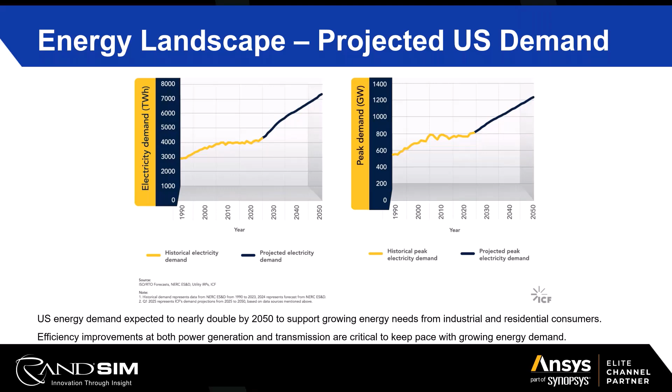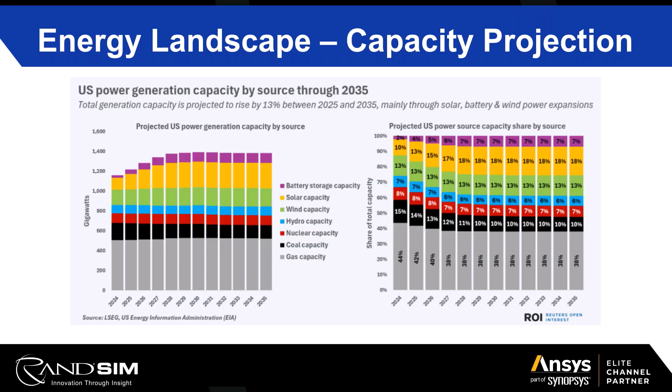For the topics of our discussion today, we're going to focus a little bit closer on wind generation. Now, while it certainly doesn't have as large of a projected growth as battery storage and solar, that doesn't mean that it's going to go away. And it certainly has benefits to be considered. And there are many simulation approaches that are worthwhile to discuss inside this domain.

So here's just a quick overview on wind energy and how we're able to capture the power from the wind. The first question that we might ask ourselves is why wind energy? Why is that a potential solution for our energy demands, or at least a contributor? One benefit is that it's renewable, meaning that it does not have a recurring fuel cost. Once it's been installed, it's intended to stay there for anywhere from 20 to 30 years.

They're highly scalable, which is quite beneficial because there are maps of the United States that show what the average wind speeds are, and it's not uniform across the United States. There are certain areas where wind is blowing at a faster speed than others. So you go where the wind is when you're thinking about deploying wind farms. And in doing so, the scalability is very important.

It's not very common that you'll see a single wind turbine when you're driving along the highway. There's oftentimes multiple of them, to take advantage of a location where wind is consistent and at a velocity that we can generate power, and where there's available room to scale out and maximize that. It has the largest renewable capacity behind solar, and when we start thinking about offshore deployments, meaning wind turbines installed out in the ocean, the deployment and land considerations really open up the doors for scalability.

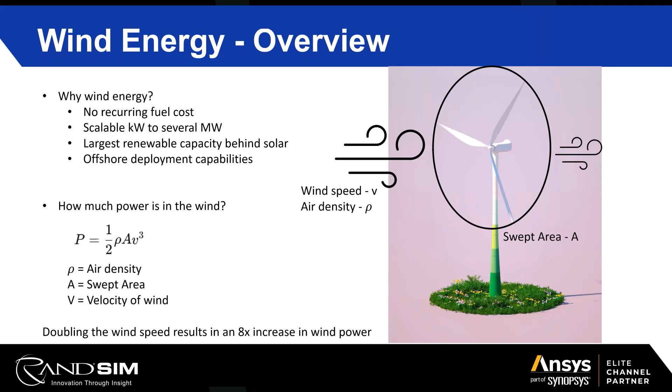And so that brings us to something that's called the Betz limit. What this is, is that wind cannot be 100% extracted. 100% of that power cannot be extracted, because what that would mean is that all of the power in the wind, all of its kinetic energy from the velocity and mass of that wind flowing through the wind turbine, would result in no airflow after the turbine. All of it would be captured inside of it. And fundamentally, that's going to prevent any additional wind from coming through and maintaining rotation of the turbine.

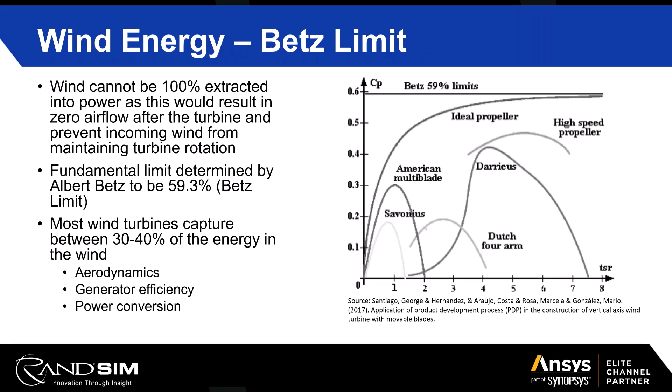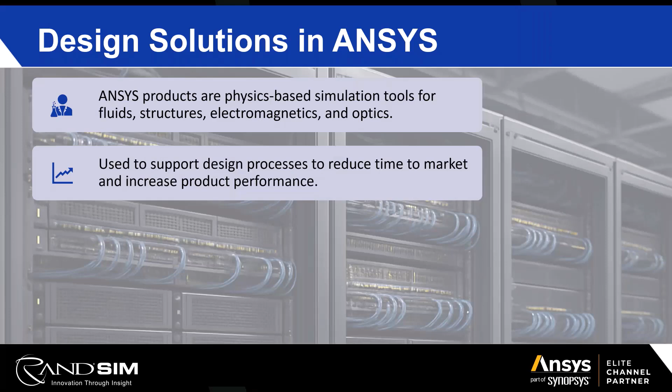So why do we use simulation with Ansys? Ansys is a physics-based simulation tool for all sorts of different engineering physics domains, including fluids, structures, electromagnetics, and optics. It's used to support design processes, reduce time to market and increase product performance so that you have a successful design moving forward.

And it allows you to understand and address cause and effect relationships throughout the design process. So making a large decision is helpful when you have data to back up that decision. And simulation can help provide those data sets to make those educated decisions.

And the implementation is important to maximize the ROI while achieving your product goals. We'll talk a little bit more about implementation, but specifically understanding when it makes sense to leverage simulation, when it makes sense not to, and really help come to that determination of where that can maximize your success without limiting or hindering your design and development process.

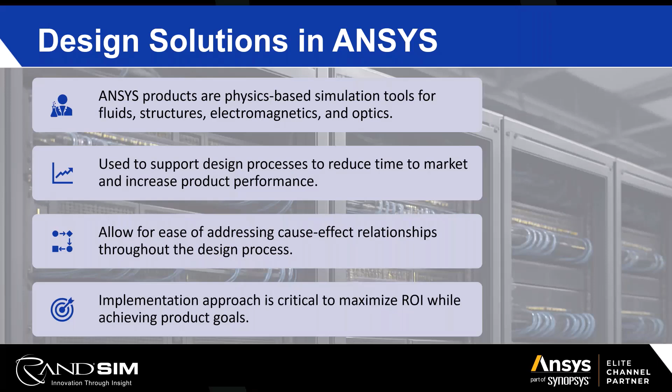So in terms of the wind turbine example, the case for simulation, there are numerous different areas, if you look at a wind turbine, where simulation can be helpful and leveraged. Everything from blade aerodynamics and turbine noise, so understanding and optimizing how the airflow flows over the blades, how the pitch of those blades impacts rotational speed.

Because a fun little fact, these turbines are often designed to operate at a desired rotational speed. So if the wind is blowing fast enough to where that speed is going to be exceeded or is under that speed, the blades can be adjusted on their pitch to speed up or slow down the turbine to get it to a desired operating speed. Understanding how the noise impacts the nearby environment is also certainly a concern.

These things are just installed for 30 years. So everything from a reliability perspective needs to be looked at from a high degree of scrutiny. Everything from blade structural forces to the degradation and wear out of the materials on blade composites and other surface coatings, repetitive forces and vibrations on the nacelle or housing.

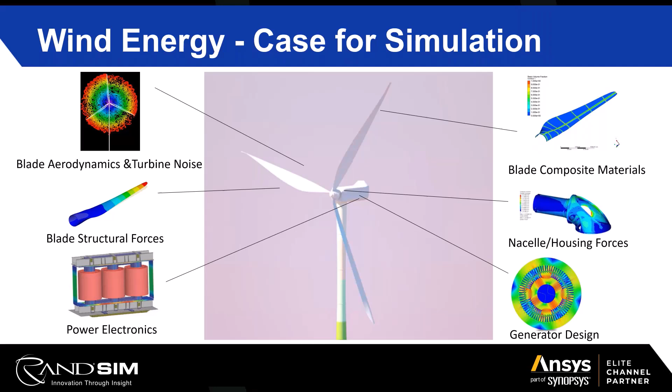Once you have that proof of concept, you like that idea, then we move into refined design standards and qualifications. So this is the refinement of the model, making different changes and understanding how that impacts the overall response. Try out different worst case scenarios that you expect your product to be encountering, and build up around the overall requirements that you've specified with simulation.

Once you're meeting requirements, then it goes into the optimize and fine-tune phase. So this is, how can we reduce weight? How can we reduce cost by less material as well? Are there any other additional performance impacts that we can squeeze out of this system, or have we reached kind of the fundamental limit that we feel comfortable moving forward in? And all of that kind of falls under the product conceptualization and design umbrella. So those are kind of the three main steps that we typically suggest and see customers leverage when using simulation.

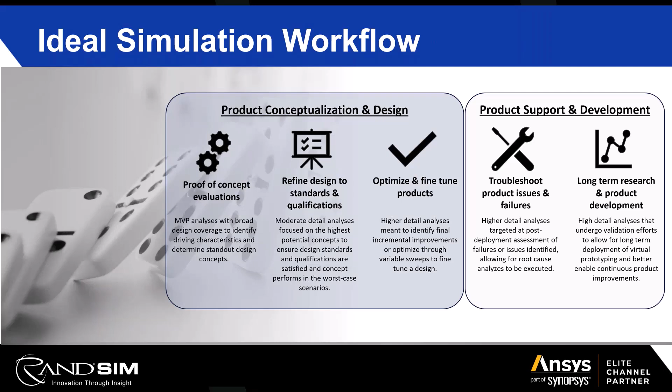And frankly, the intention of simulation is to reduce design cycles and reduce risk. So we oftentimes consider looking at a more value-based simulation approach, where we really kind of boil it down and put the best practice workflow. You could set simulation and all these different steps aside for a moment and just ask yourself the simple question: what is the problem that I'm facing? What is the question that you need to answer? And what is the simplest way that I can get to that answer?

Because a lot of times with simulation, you can take your simulation study to varying levels of fidelity depending on the problem that you're trying to solve and the level of detail that you're trying to get it to. So understanding, am I just trying to see if this would work, or am I trying to squeeze the last few percent of efficiency out of something? Ask yourself where you're at and really boil down what the actual question is that you're trying to get an answer to.

And so that starts by determining a specific goal. I want my rotor blades to sustain expected wind shear forces repetitively over a decade and understand what the strain is for that. Or I want to reduce the core loss inside of my generator. Or I want to make sure that my power electronics board can handle the thermal cycling of a North Dakota field from summer to winter for the next 30 years, and no components break off or fail prematurely.

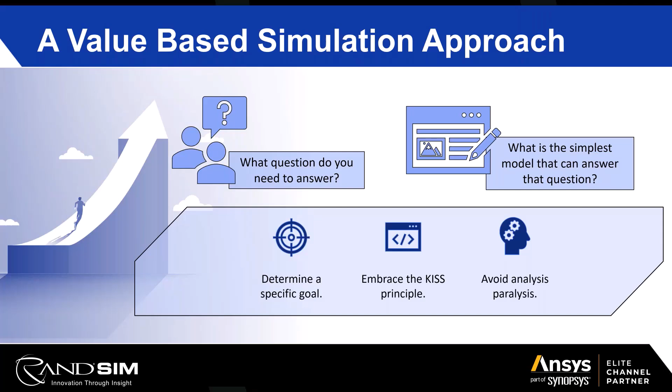Okay, so moving into a couple specific Ansys workflows that are relevant to wind energy. The first one we have here is blade design. And so blade development leverages a multitude of different Ansys solutions because it is a multi-physics problem. We have air flowing over a blade that is creating lift, and that is creating rotational forces on the turbine, and that is subsequently generating energy. So aerodynamic as well as structural loading are two things that are particularly important. So for this blade design, the primary goal is to develop lightweight blades that can withstand heavy aerodynamic loads while optimizing shaft power.

And so for the simulation approach, we leverage Ansys Fluent to perform blade aerodynamic simulations and iterate through various design iterations of blade geometries to identify, for the same given velocity of wind, how much shaft power can be generated based off of that blade design.

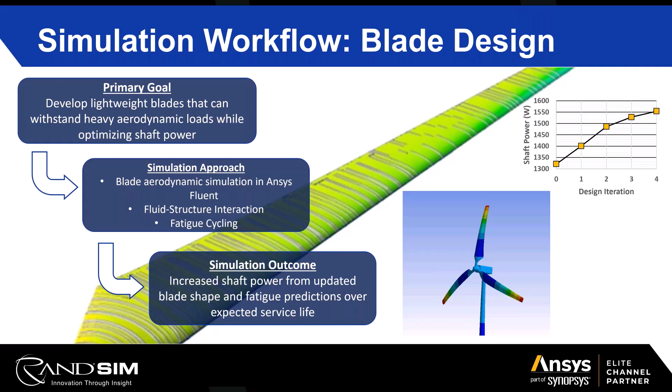For understanding how aerodynamic loads will impact the structural integrity of the blades, Ansys has fluid structure interactions where we take aerodynamic forces solved in Fluent and map those to convert and solve structural forces and strains inside of Ansys Mechanical. This allows us to perform fatigue cycling and determine not only have we identified a better performing structure for the blade to generate power, but that structure also withstands the expected forces that those blades are going to see.

And so the simulation outcome in this regard becomes an increased shaft power from the updated blade shape and fatigue predictions over the expected service life. So driving a higher degree of confidence into those blades that not only are they going to generate more power, but that they're also going to last in the environment that they're going to be placed into.

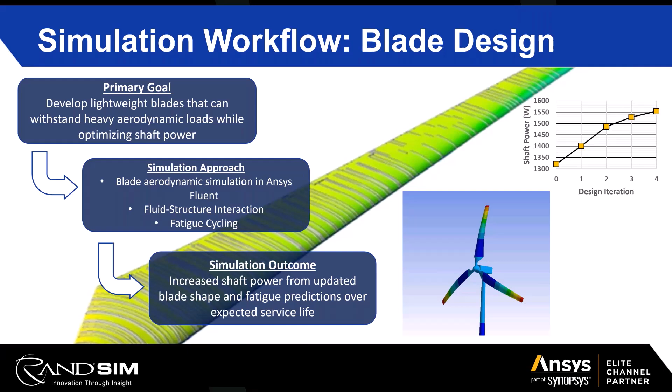The next one is a simulation workflow around the nacelle design. So the nacelle is essentially the housing that encompasses the gearbox, the generator, and some of the power electronic circuitry inside of the wind turbine. And so design a turbine housing to maintain strength and stiffness against turbine rotational forces. So this housing is under a lot of force, rotational force from those very large turbine blades spinning.

And these things are enormous. You see them driving down the road, they are very, very long. And if you get up close, they're much bigger than you imagine. So you can imagine how much force those blades spinning can create on this nacelle.

We also think about the shear or the axial forces coming in along the housing of the mount of the turbine as well. So this housing or nacelle is subjected to many different forces and needs to be sufficiently designed so that it can withstand said forces.

Ansys Mechanical is a fantastic tool to leverage here. It can utilize parametrics to perform sensitivity analysis and identify where material needs to be, where it can be removed to reduce material costs, but also maintain structural integrity and ensure that it will last without premature failure over the service life of the turbine.

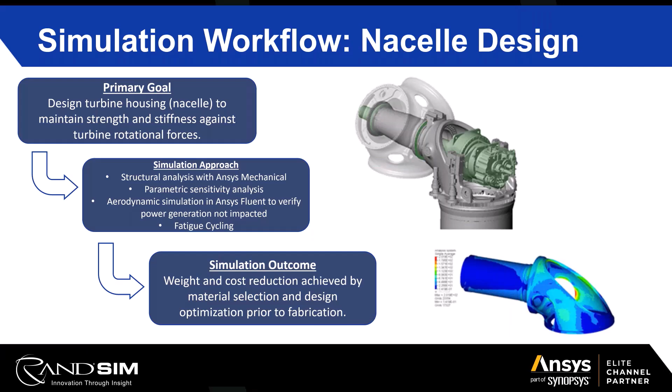The next one is specific to the generator. So our goal here is to develop a high power density, highly efficient generator that can generate power to the grid over varying wind speeds. So if you think of a generator or a motor, when you plug it into the grid, it's going to run at the synchronous speed, 60 hertz for the United States.

So if we were just to place a simple AC generator onto the grid and spin it at a speed that's non-synchronous, we're going to meet resistance from the grid. Generators that are developed in wind turbines acknowledge this and understand that for their specific application, the generator is expected to spin at varying speeds because the wind is going to be changing.

So they leverage what's called a doubly fed induction generator, and what that allows us to do is to utilize power conversion circuitry and convert the energy that is generated from the turbine into DC, and then convert it back to AC to connect with the grid. This allows us to operate at speeds that are non-synchronous and adjust for variability in the wind.

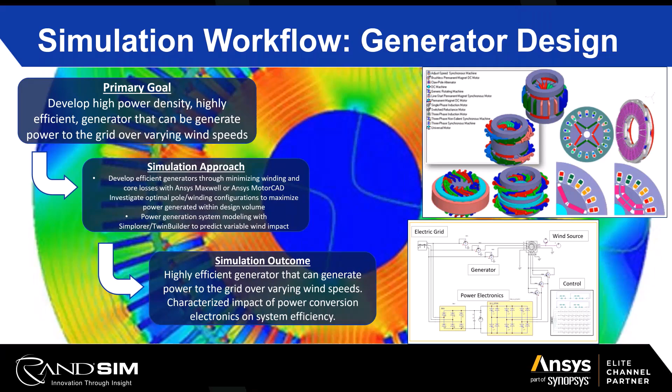And then the last simulation-specific workflow for the energy industry and wind energy that I'd like to talk about here is electronics reliability. So inside of all those power electronics, where things are being converted and switched and connected up to the grid, we have electronic circuitry. That electronic circuitry is often placed on printed circuit boards. And just like the rest of the wind turbine, these things are hopefully going to be installed for a long period of time with minimal maintenance.

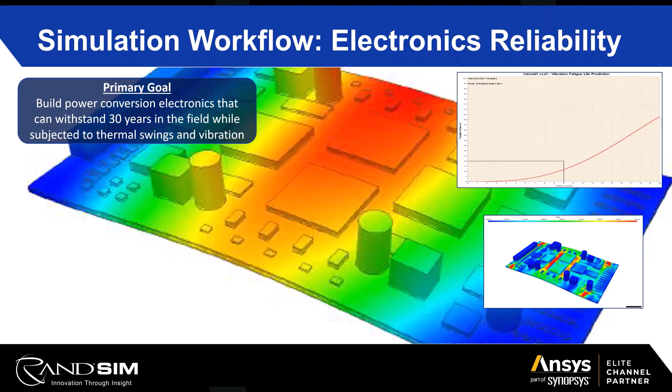So having a board last the entire lifespan or close to it for the power electronics is certainly desirable in this industry. So our goal: what can we do to ensure that our power electronics are reliable and can withstand 30 years in the field while subjected to thermal swings and vibration? Thermal swings being they're outside, they're subjected to the highs and lows of the temperature of that environment, vibration from the wind, rotational forces. We want to make sure that these boards aren't going to prematurely fail.

So our simulation approach here is to leverage Ansys Sherlock to predict premature field failures on these PCBs and other power electronics systems. Sherlock is a life cycle prediction tool that takes in your PCB CAD information that includes information about your bill of materials and your components, and performs FEA analysis for thermal, vibration, and shock, to name a few, to characterize and understand and predict how long this is going to last in the field.

So the graph here on the right that you see with the curve pointing up and to the right, the x-axis on that graph is the life cycle in years. The y-axis on that graph is the probability of failure in percent, 100% being at the top, 0% being at the bottom. And the little box that is drawn around this graph in the lower left of it is showing the target performance for that specific product. So in that instance, for 10 years, no more than 20% field failures due to vibration is what that is currently orchestrated as.

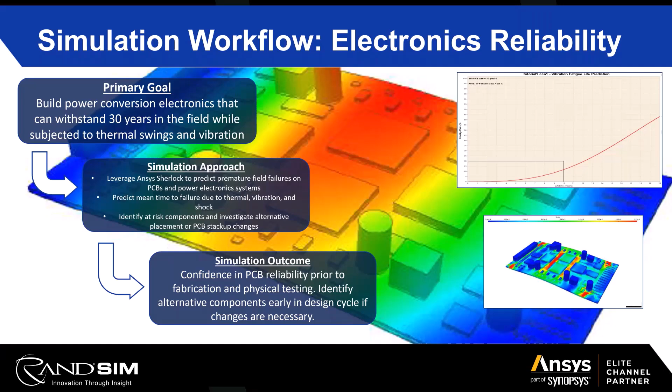And then just a couple closing remarks here. Energy demands are only going to increase, so developing efficient energy systems is critical to keep up with the expected demand. But engineering problems can be complex. It's very easy to get stuck in the weeds to determine what is important and what is a nice to have. And simulation is a powerful tool to help you uncover and develop whatever product you're working on. I know we've been talking about energy and particularly wind energy, but for whatever product you're currently working on, simulation is a powerful tool to help you.